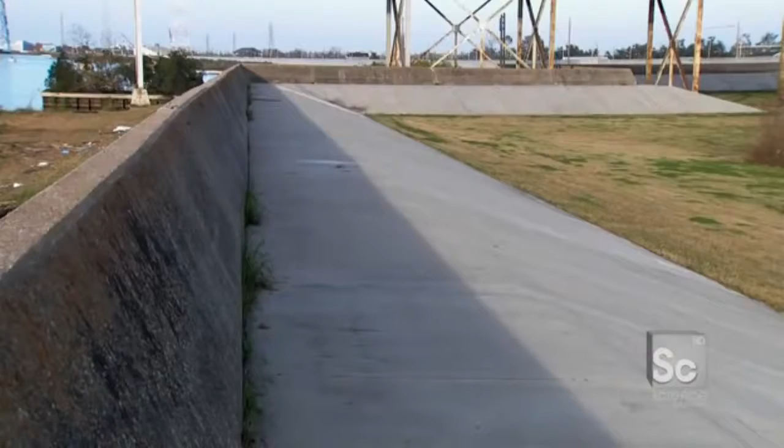Prior to Hurricane Katrina, stormwater flowed into New Orleans and was met by a 350-mile network of earthen embankments called levees. Located just 100 feet from people's homes, they held back the water, keeping the city dry. But when Katrina hit, the system was so overwhelmed by water, the levees broke in 50 places, flooding 80% of the city in just 5 hours' time. To avoid this disaster happening again, the surge barrier is being built miles away from downtown New Orleans, where it can stop the water before it enters the city.

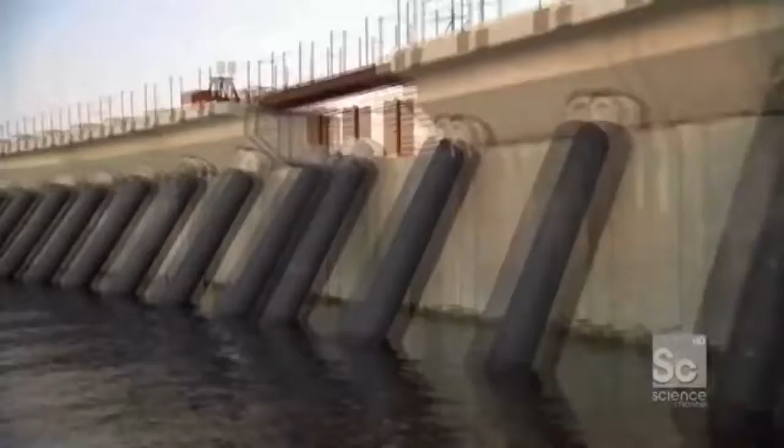Instead of waiting for the storm to come to them, for the first time, they are taking the fight to the storm. Is this a new way to think about battling hurricanes? Nowhere in the world have we built a wall trying to keep out 25, 26 feet of water. No one's ever done it before. And this height here on a storm surge is unique. You gotta remember, the hurricanes that come to New Orleans are bigger, meaner, and there are more of them.

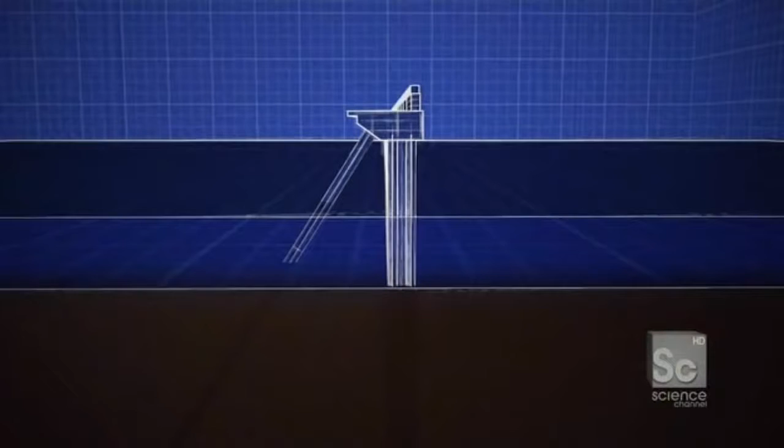To hold back a 26-foot wall of water, the barrier is fortified by 628 batter piles. When the storm surge hits the wall, what pushes back and keeps that wall upright and strong are these guys right here. They're called batter piles, and they're basically 288-foot-long steel tubes inserted into the back of the wall that support it and transfer all the loads of that storm surge into the foundation. Since there's no bedrock to hold the pile in place, over 80% of the wall is actually below the mud line. The deeper the pile is driven, the more friction there is to hold it in place. Each pile is almost as long as a football field and placed at an acute angle for added stability.

What'll be interesting about this lift is that this pile right here is horizontal, right? But in the end, we have to get this thing at a 57-degree angle to feed it into the machine called the leads. No one has ever attempted to drive piles this size at an angle before.

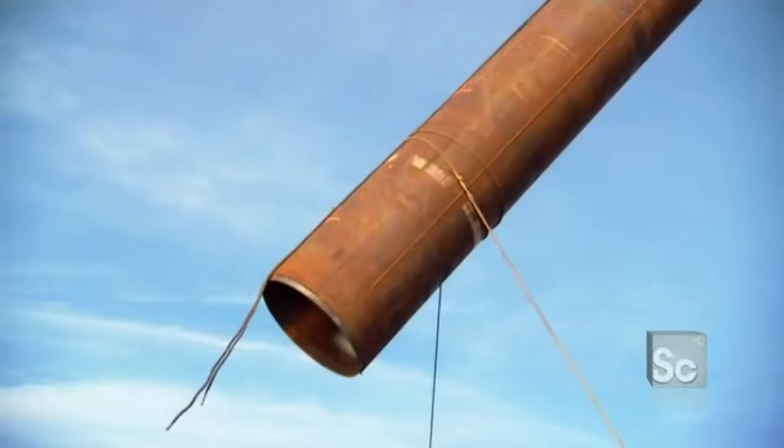To accomplish this engineering first, the Army Corps invented a massive 1,000-ton machine called the leads. Unlike traditional pile drivers that can only hammer vertically, the leads can hammer the piles at a precise 57-degree angle. And with 4 chutes, they can drive 4 piles in a row before moving on, saving almost 5 months of construction time.

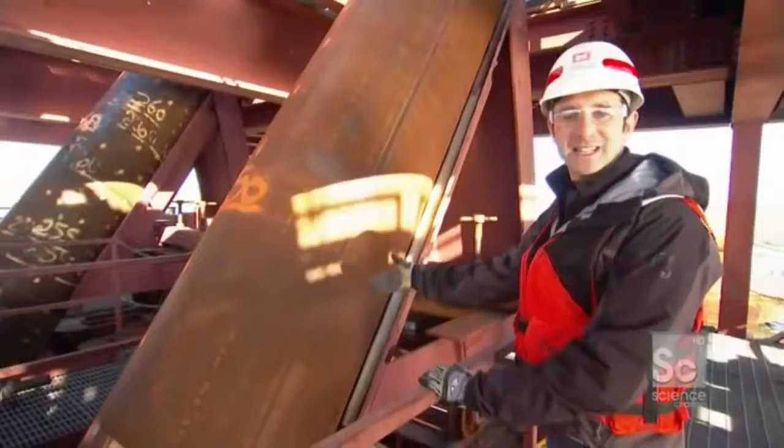So here it is, lowering it through the leads, right? The thing that's leading it right down this 57-degree angle, getting into position so we can start knocking this straight into the ground. Even the leads isn't big enough to handle a 300-foot-long pile in one go. So they're driven in two sections. The first section is 158 feet long and weighs more than 13 tons.

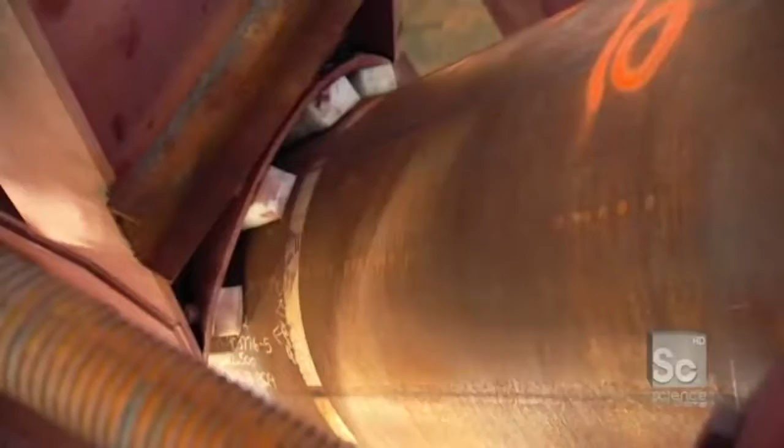So Mike, as I'm looking at this slowly creep down into the earth, this is just sliding into the soil below, right? Into the mud, yeah. I mean, there's really nothing down there, huh? Not much. I mean, it's soft. It's so soft that the pile sinks 38 feet in a matter of seconds under its own weight. After that, the friction from the mud becomes too great, so they have to use a hydraulic hammer. Do I run that hammer down? Absolutely. Time to drive the hammer.

So it's your job to control how much force this thing hits it, when it hits it, and how you drive the pile down. That's it. So before sun sets today, we're gonna start smacking this thing and send it in? Right now, the next 2 minutes. If everybody's ready, got the earplugs on, let's go. Let's do it. I got earplugs. I'm on. Let's start smacking it.

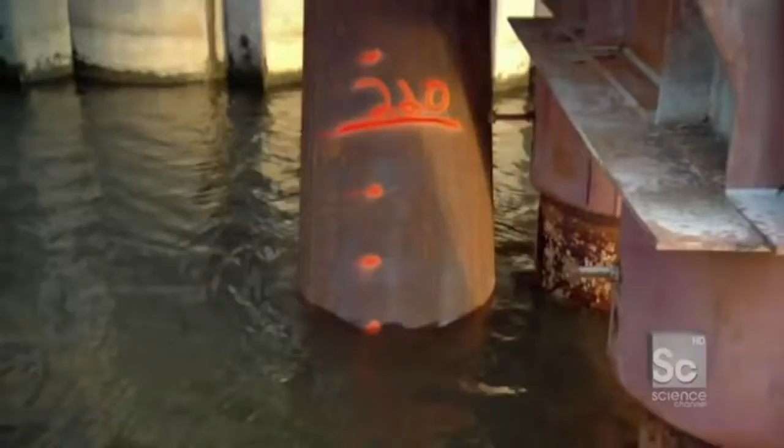So every time that smacks the pile, that pile gets pushed a little deeper into the ground. During the first 158 feet of driving, each blow moves the pile 10 inches. But as the pile goes deeper and friction increases, it takes 40 blows to move the pile that same distance.

So Mike, the first piece is now in place. Right, and now they're gonna bring over the second piece, which is that one right there.

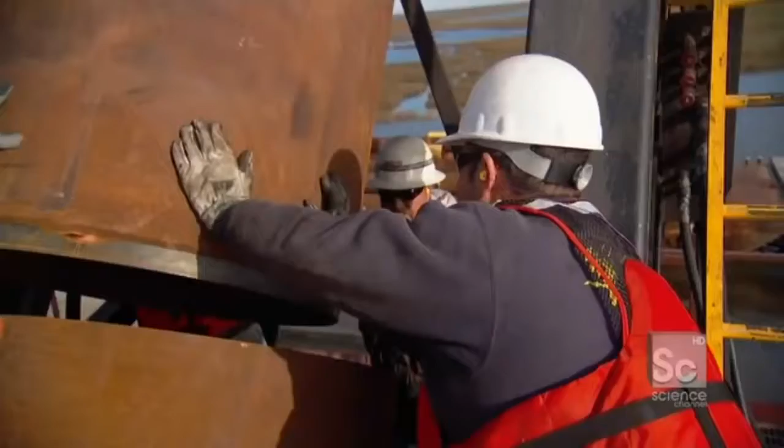Loading like a rocket launcher almost. They have to get the piece in, tamp it down, and line one end up with the next. Line it up, line it up! All right, so here it is, it's coming down. You can see we're basically gonna fit this piece into that piece, have a little bit of an overlap, and that's what they're gonna weld together.

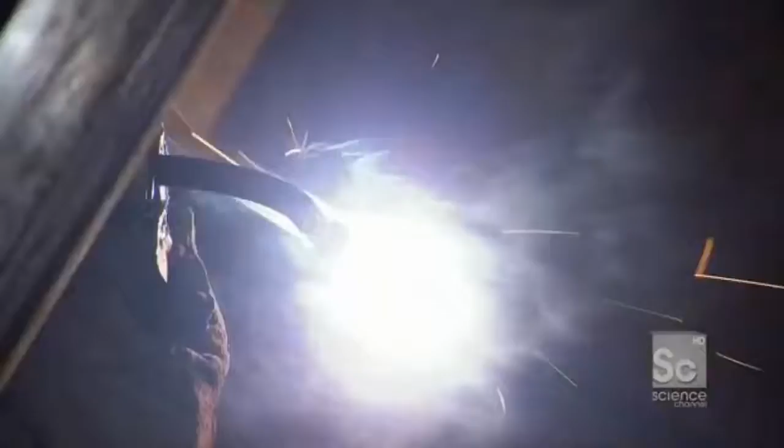So if you look right there, you can see the weld's been completed. Those two separate pieces have now been spliced into one, and now that pile is 245 feet long. The weld looks good. Yes, sir. We're ready to drive it, put it on the ground. This is the last time we're gonna see this pile in the air.

So let's flip the hammer on and start smacking. Smacking it. Are you ready? Yes, I'm ready, whenever you're ready. I was born to smack pile.

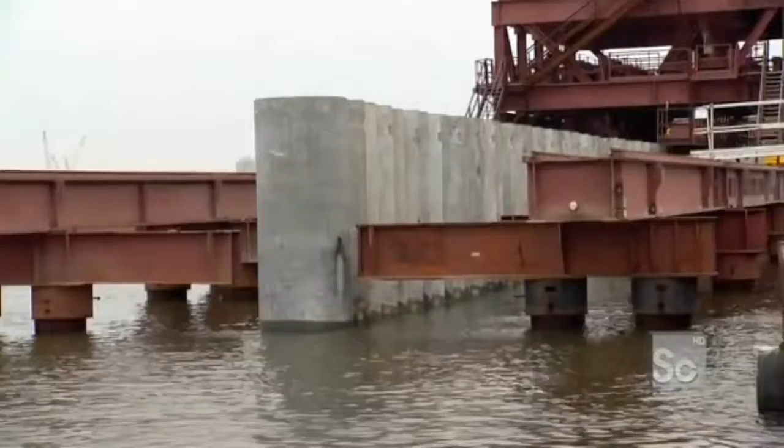It takes around 1,200 blows to get one batter pile into place. And to stay on schedule, they need to install 628 of them in just 6 months—a total of about 750,000 blows. Normally, a project of this magnitude would take more than 17 years to complete. To make New Orleans safe as quickly as possible, the Army Corps is attempting to finish the surge barrier in just 3. To pull off this incredible feat, this crew has to work through hurricane season.

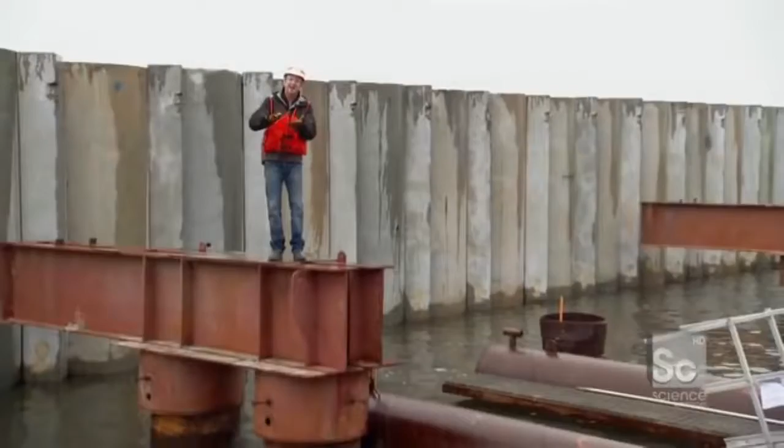So engineers came up with an innovative solution to get the job done right and done fast, even in rough waters. One of the biggest challenges when you're working in the middle of a lake is having a level surface on which to work, because barges move and tugboats pitch and roll as well. So in order to have a flat surface to accurately work, they developed that system right there called a trestle. It's a semi-permanent track that moves along with the wall construction. A trestle is basically a huge railroad track anchored into the lake bed, providing a stable workplace for large machinery.

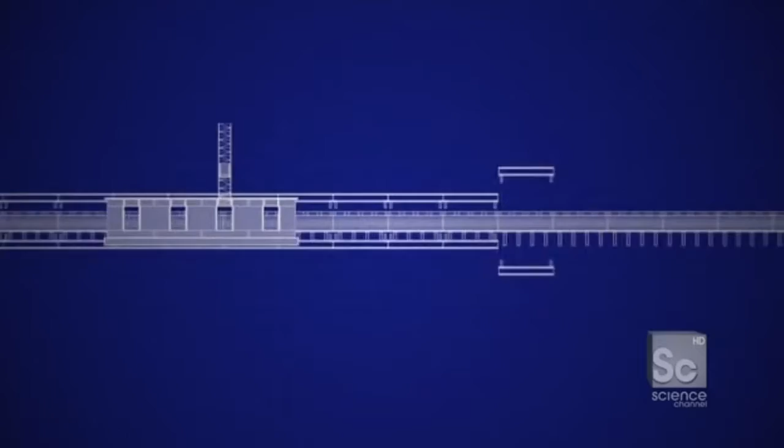The project has 1,000 feet of track for the entire 10,000-foot-long wall. So to keep construction moving forward, the trestle team has to leapfrog 50-foot sections from one end of the site to the other up to 6 times a day. 50 feet of trestle track's about to go from this barge up in the air and extend our construction platform another 50 feet. Each trestle segment has to be aligned seamlessly with the existing track. The gap can be no more than 3 millimeters, or about the thickness of a shoelace.

Okay, so now that we have the trestle track, generally speaking, in place between the two beams, let's walk on the trestle. I'm standing on the pre-existing trestle track, and this right here is the new piece of track. As you can see, we have a big gap. We'll use this plate right here to put it on either side of the track, put the bolts in, and bind the track together. 6 bolts need to be in place to ensure a solid connection between the trestles.

The issue is we have 5 out of the 6 bolts lined up, but one side is slightly higher than the other side, so we're having a problem getting in the final bolt. The holes are about 3 millimeters off. In order to make that space to get it through, we're going to torch it out.

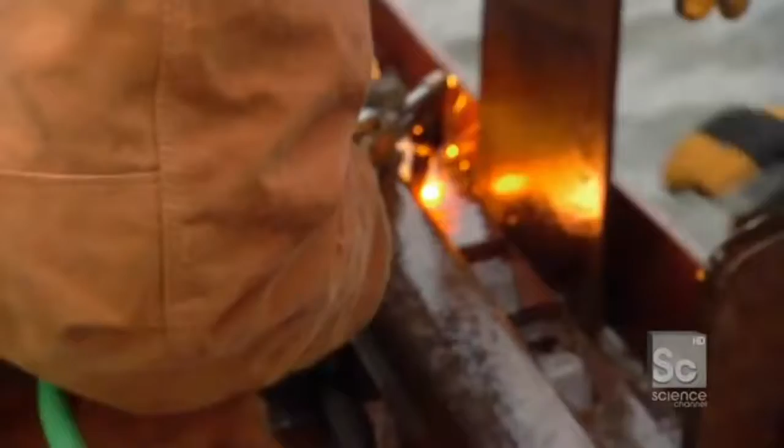Would it not have made sense for me to move before he started? And on the plus side, actually, it's really cold and rainy. My right hand is much warmer than it was a minute ago.

Well, after cutting, torching, and hitting, and just generally some emotional consternation, the sixth and final bolt is through. This track has now been extended 50 more feet. The construction site will extend. Can we go home? We're finished now?

Up next, building new lives and new hope in the 9th Ward, with houses designed to fight back against the worst Mother Nature has to offer. These houses are being built to survive another Katrina.

When you think about what took place in New Orleans, you of course think about Hurricane Katrina. But the truth is, the actual damage wasn't from the hurricane, but from what the hurricane created, something called a storm surge. A storm surge is a wall of water pushed out in front of a hurricane by high winds and low pressure. During Katrina, it caused waters to rise more than 20 feet, overwhelming the existing hurricane protection and flooding almost the entire city.

Katrina's storm surge was responsible for 90% of the destruction in New Orleans. And hardest hit was one of New Orleans' poorest neighborhoods, the lower 9th Ward. I was actually here filming 5 years ago, right after the event, and it was harrowing. There were houses that were just blown clear off their foundations. Others were torn in two. I saw a house that was actually sitting in a tree. 5,000 homes were lost in this neighborhood alone, and less than 20% of its residents have come home to rebuild.

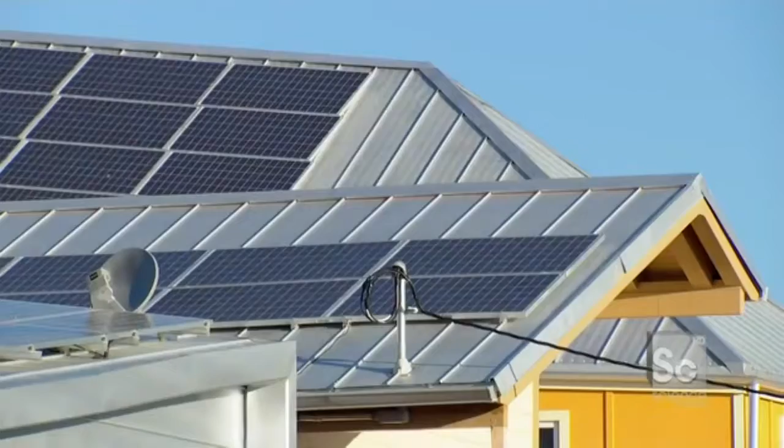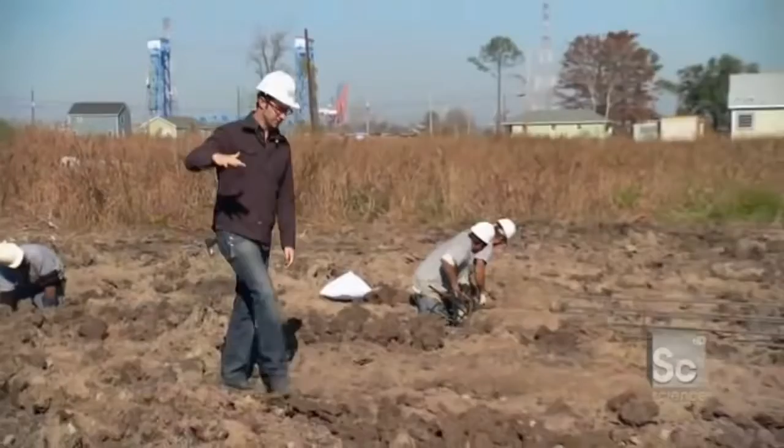These homes are re-engineering the lower 9th Ward, transforming it into one of the most hurricane-resistant neighborhoods on the planet. But one of their biggest challenges isn't wind and rain, it's the ground itself. Like most of New Orleans, the lower 9th Ward is built below sea level, which basically means the ground below me is a big swamp. You build a house here, over time, it's going to sink. So to prevent that, the Make It Right houses begin construction by driving these massive 40-foot-long piles into the earth.

This is what they had before Katrina, and this is what they're getting right now. These are built to last. These houses are built to survive another Katrina. These piles are revolutionizing how homes are built in this flood-prone area.

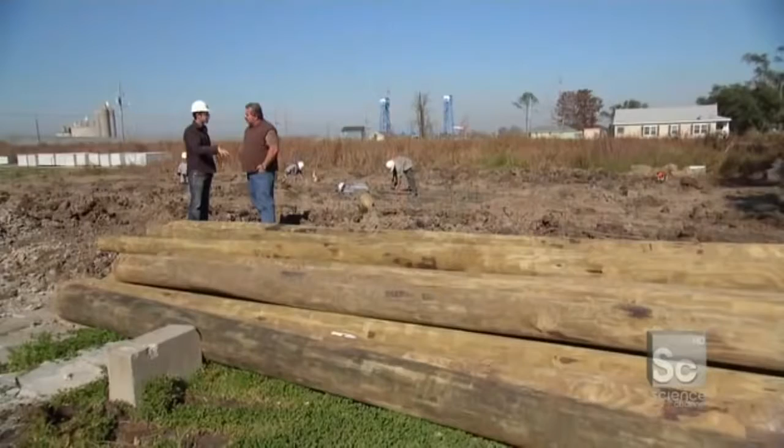Previously, homes rested on top of cinder blocks. When a flood came, the house would be lifted off the blocks and sent crashing through the neighborhood. But now, these wooden piles stabilize the soft soil so it can support a raised concrete foundation. It actually attaches to the house, strong enough to keep the home in place, even in floods more than 12 feet high.

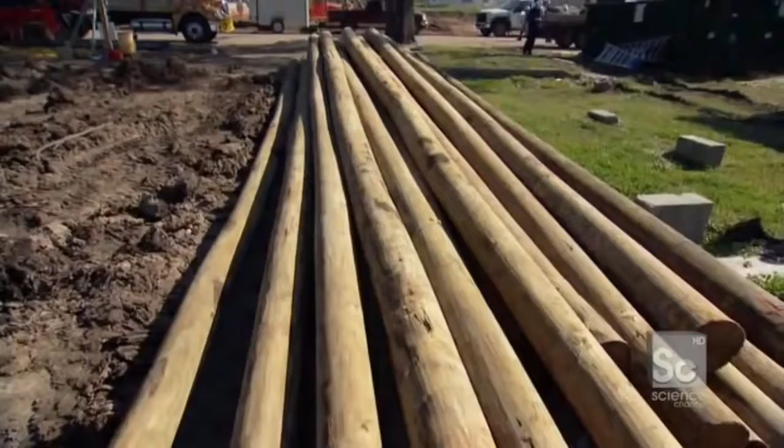Chris, how do you get a 40-foot pile rated to carry 7 tons into the swamp? You use that machine over there, called a sonic side grip vibratory driver. It puts out 50 tons of centrifugal force, and it'll push that pile underground in about 2-3 minutes.

So this is it, huh? This is the machine. It's like a construction action hero. My God. Tony, why don't you spin her around so we can look at her? This has got a kind of a Mad Max Beyond Thunderdome vibe to it, you know what I mean? Yeah, I never get tired of watching it work.

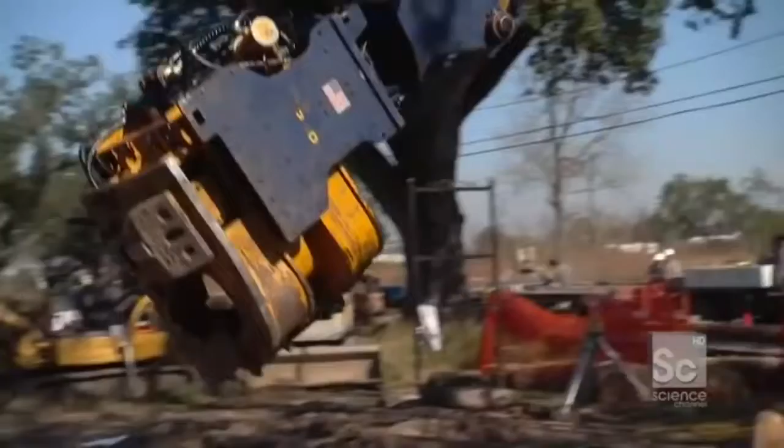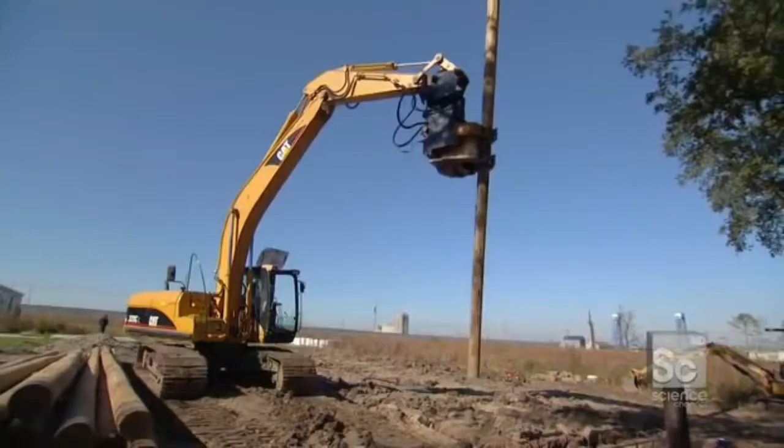No one has ever used a pile driver like this to install foundations in the lower Ninth Ward. Its unique articulating arm can grab, lift, and drive the pile all in one shot. The work gets done 3 times faster than if they used a conventional pile driver. It grabs the pile by eye, swings it into place like it's his extended arm, and puts it right down in a matter of moments.

Tony says the only place he really feels at peace is in that machine. You can kind of see that too, right? Yeah, oh yeah. To lift and move a pile requires careful coordination of 6 controls all at once.

Tony's located the pile right in the corner of the foundation. We have a little circle mark for him, and he's just gonna put this thing dead smack. Perfect.

He's lined up, he's level. Now it's time to vibrate. Tony, you ready?

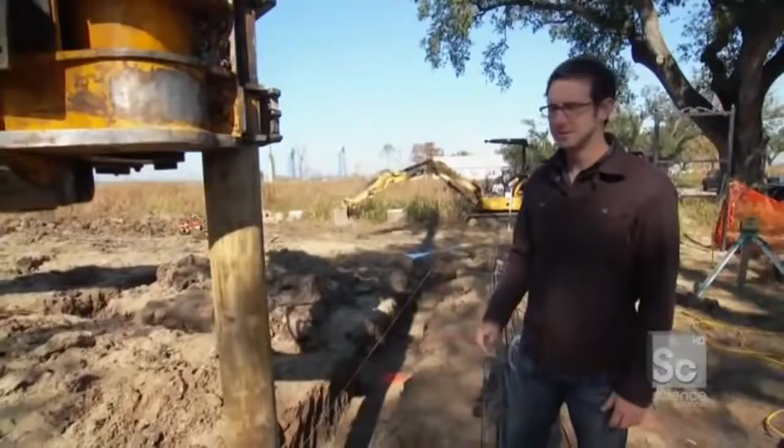You literally feel the ground shaking, within like a 5-foot radius around Tony's workings - like my feet, my toes, my back. I'm itchy right now from the vibrations running through me.

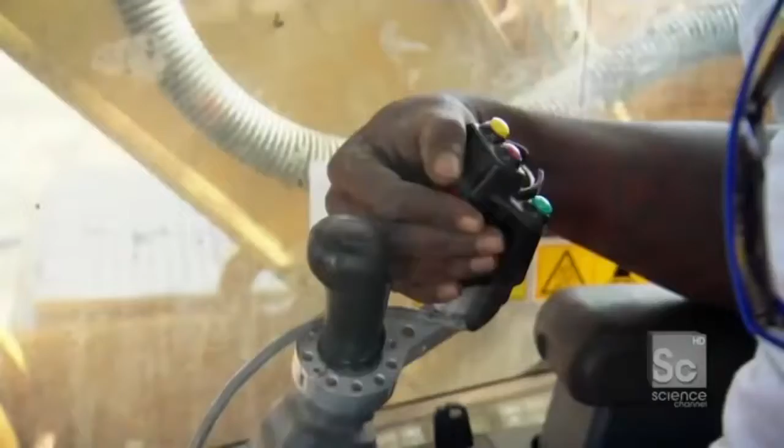So now what I'm standing on, even before the foundation gets here, is 40 feet of pile below me. And it's from this point the house now begins.

Is it hard for a rookie? The hardest part's picking the pile up. Let's give it a go. I'm gonna drop some piles.

So you're Tony. Yes. I'm Danny, nice to meet you, Dan. How you doing, man? I'm okay. We're gonna switch jobs. You do the yelling and walking around and talking and not doing anything productive. Sounds like a winner. And I'll do the work. Sounds like a plan. All right, Tony.

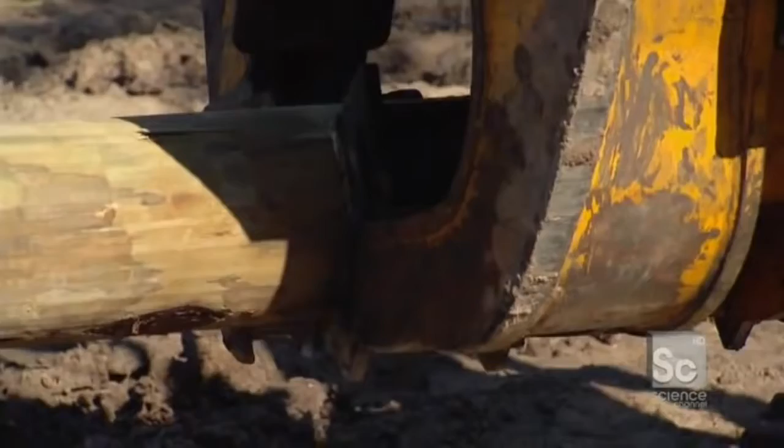Chris, watch this man, this is gonna be a little piece of magic. Can't beat that. How's she looking? First time out, that's not too bad.

Now tell me something, you're from here, right? Born and raised here. So regardless of the next event, next storm, if it happens again, you come back? We're coming back, this is home, this is life, this is reality here. I come here sometimes with my kids just to show them the houses, you know. This is what we doing, we bringing people home. It's good stuff, man. No, it really is. Thank you, it's amazing.

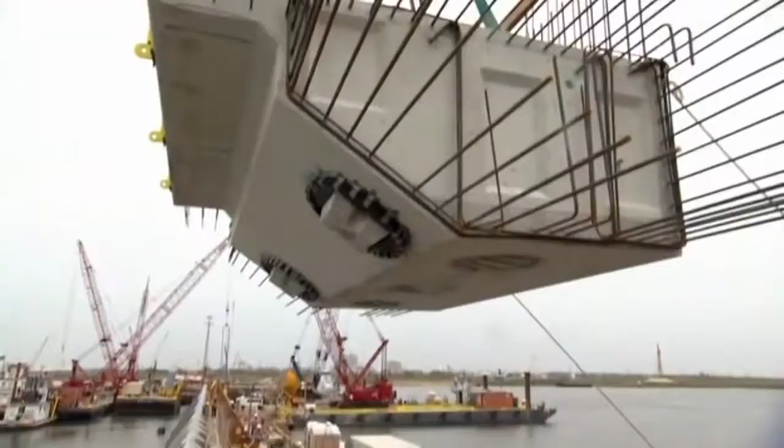Up next, putting together the strongest wall ever built, and we're gonna literally thread the needle in some of the worst soil conditions in the world.

Since it was founded in 1718, New Orleans is a town that's been working against the elements, primarily because 80% of this place is located below sea level. But for the first time, New Orleanians are trying something new, working with nature instead of against it.

New Orleans is built on top of a giant marshland, which for millions of years naturally absorbed thousands of gallons of rain and floodwater. Today, most of that spongy marsh is covered by pavement, causing significant problems for this flood-prone city. In a typical situation, when it rains, what happens to that water? How does New Orleans deal with it?

That water runs off, goes to our curb and gutter, goes about 8 blocks to the north of us, and is pumped over a levee at about 2 cents a gallon. That's expensive, it's time-consuming, it's a problem if the pumps fail. It's not sustainable. And relying on the pump station, relying on the city hasn't always worked so well for these citizens.

Over half of New Orleans is located below sea level. This paved city is basically a big bowl. When water comes in, the only way to get it out is with pumps. So when the pumps failed during Katrina, the lower Ninth Ward was left underwater for more than 3 weeks. We're in a situation where our community has a real fear of water, and it's a valid fear of water. So the folks in this neighborhood have a different mindset on water, and we're trying to change that paradigm.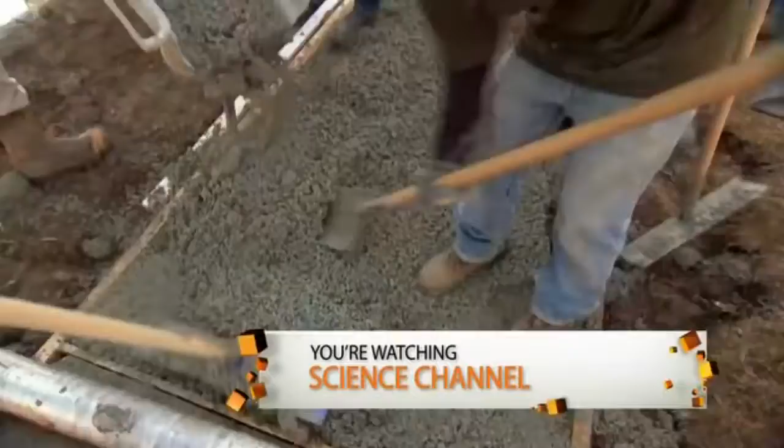To make sure this neighborhood is not left underwater again, engineers have found an innovative solution to radically reduce the need for pump stations, called pervious concrete. As water runs off our site, it does the opposite of what typical pavement does. Instead of a giant table that tilts water and flows it to the curb and gutter, this is a giant sponge that accepts rainwater, stores it in the concrete and below, and doesn't hit the curb and gutter and run off our streets. So you're telling me this driveway and this sidewalk, when rain hits it, it's actually going to absorb that water?

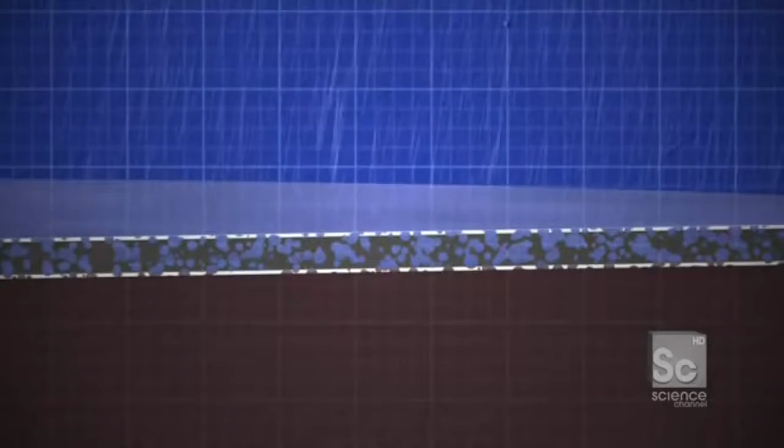Correct. Unlike conventional concrete that repels water into the storm sewer, pervious concrete absorbs it. Filled with tiny air pockets, it allows water to flow through it and into the native marshland below, where hundreds of thousands of gallons can be stored naturally.

Do you have any actual finished stuff that we can see? Yeah, we have a little mock-up right here. It actually does look like a Rice Krispie treat. Look at that. All right, let's simulate right now.

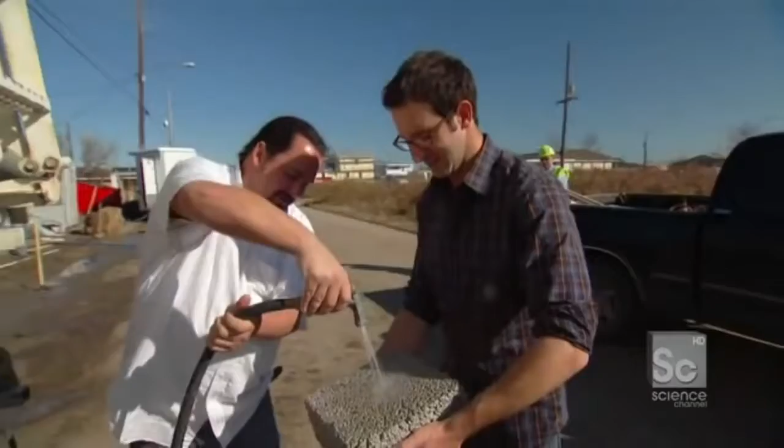I'm a driveway, you're a rainstorm, and the rain's coming in. It just stores up, it's just eating it like a sponge. And then it comes out the bottom. Look at that. Now, typically, all that rain we just dumped down would go from this driveway into the sewer system and have to get pumped out. Correct. At ultimate build-out, we will be saving several hundred thousand gallons of water hitting the storm sewer every rain event.

And that all starts with you, me, and a bunch of guys pouring some concrete. Absolutely. Here it comes.

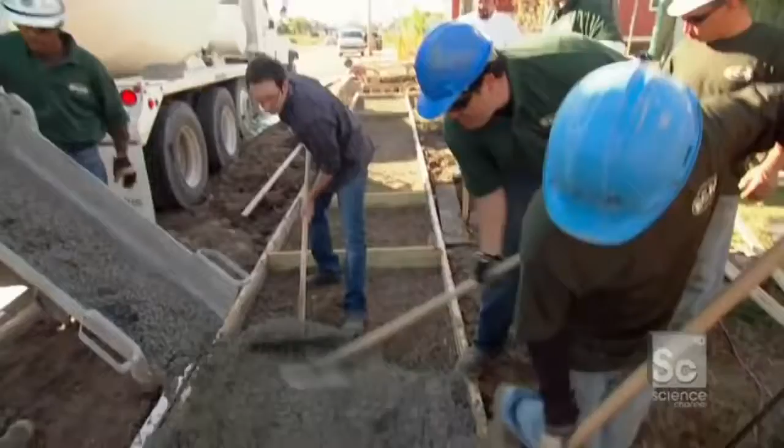It doesn't look normal, right? It's much drier, thicker, and chunkier. Because of this consistency, pervious concrete pours much slower than conventional concrete and dries much faster. So we have just 15 minutes before the concrete sets. We're actually trying to push the concrete out, but then actually compact it. Yeah, we're gonna compact it.

We're gonna pour it three quarters of an inch higher. Got it. What I'm doing right now is sort of the opposite of what you do with normal concrete. Typically, you vibrate concrete to get the air bubbles out. Here, we actually compact it tight to get lots of air bubbles inside of it. That's how the water goes through it.

Compacting the concrete is the most critical part of the process. If it's compacted too tight, it won't absorb the excess water. Too loose, and it'll crumble. To do the job quickly, they use a specialized 150-pound roller called a screed.

Ready? You want to pull it? Yeah, now I'm pulling it. All right, come to me. Here we go, stay with me. Here we go, nice and slow.

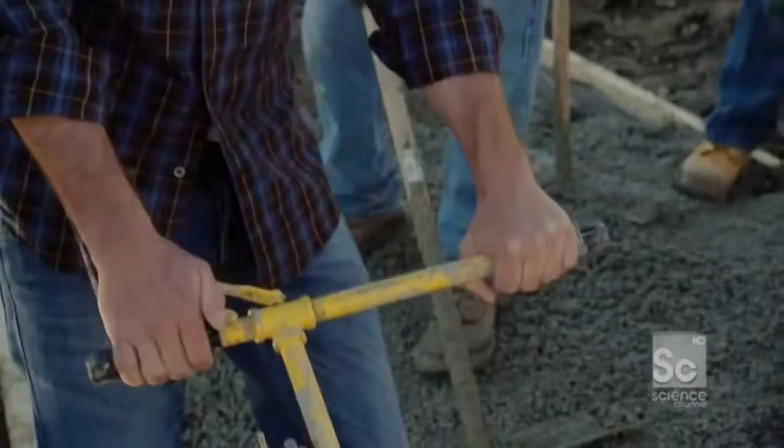I'm making pervious concrete. You know why? Because I don't want concrete to push water into the sewer system, do you? No, you don't. Good job. That was perfect.

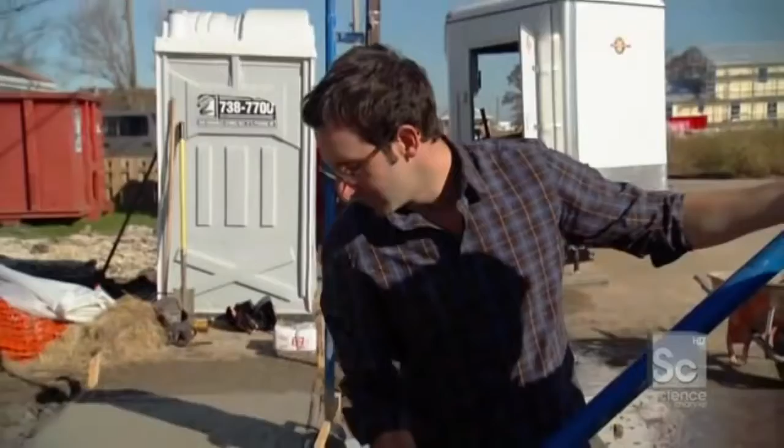Beautiful. And although it may not look like it, this is actually the finishing touch. This is the layer of concrete that you'll see every time you walk down the Make It Right streets. Big, hard, dense Rice Krispie treat that all the while is sucking up the water and making sure it does not go into the streets. I love it, man.

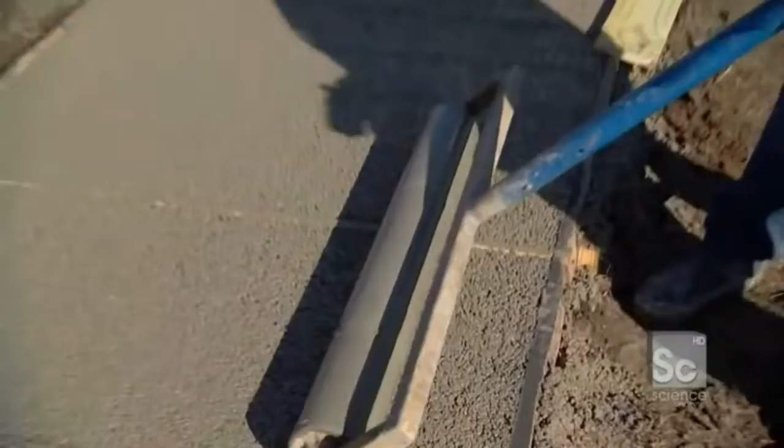So for me, what I'm fascinated by is that you want this to be strong and heavy and beefy. But if it's too heavy, the soil's so weak your wall will actually start sinking. That's one of our challenges. We need a very strong wall, but you also need a light wall, comparatively speaking, for concrete. You can't build a Great Wall of China here because the massive weight of it would simply sink out of sight.

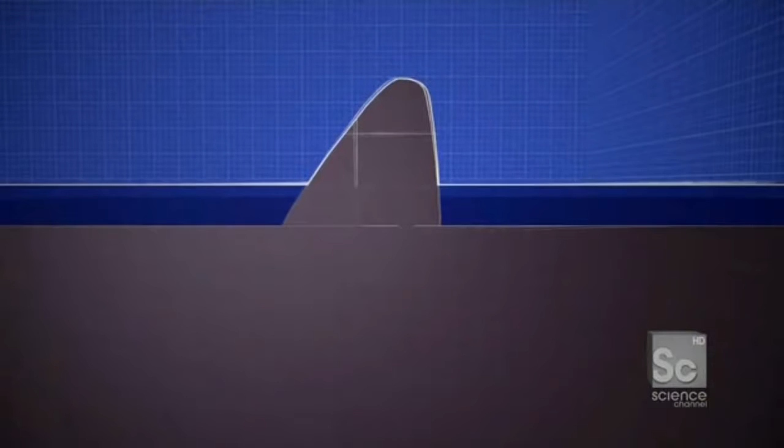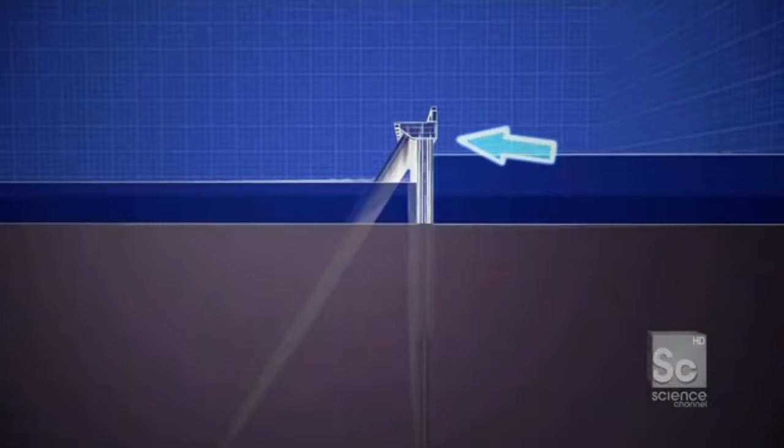Instead of building one solid structure like most levees or dikes, engineers designed the New Orleans surge barrier as an A-frame. It uses half the material, but it's actually stronger than a solid structure. The key to its strength? 330 concrete caps placed at the top of the A. They link the vertical piles to the batter piles, directing the force of the storm from the front of the wall, through the batter piles, and down into the marsh, dispersing the loads and keeping the wall strong but light.

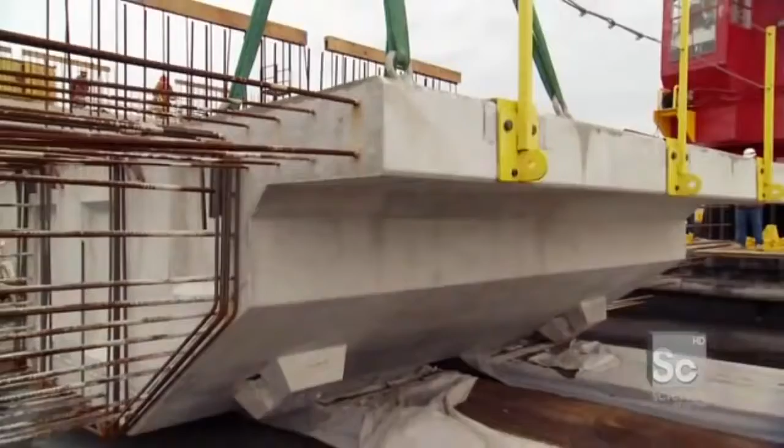All right, so Vic, when the soldier piles are in, the batter piles in place, what ties them all together and makes them one structural system are these guys right here. That's right, these are caps. So essentially your chain is as strong as your weakest link. Yeah, absolutely, and this is the link, essentially. This is what connects the two types of piles. Right, this 96-ton piece of concrete, very high-tech design, transfers that energy.

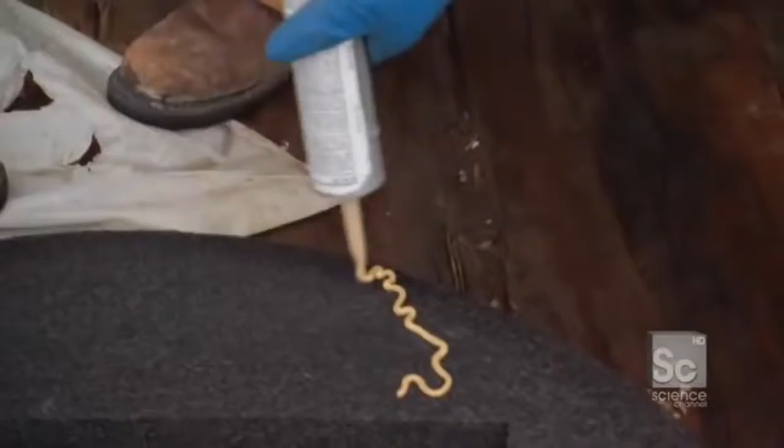Before the cap can be lifted, each joint has to be reinforced with a waterproof seal installed between the cap and the piles. This is the seal, right? It's like the gasket, to hold the concrete on. Keep it tight, to make sure the batter pile meets the cap and you get one tight joint. The seal between the cap and the batter pile is created by the weight of the 96-ton cap.

Luis, AKA Jackson Pollock of the glue, uses construction glue to hold the seal in position while the cap is lifted up onto the wall. All right, Luis, let's pop it on.

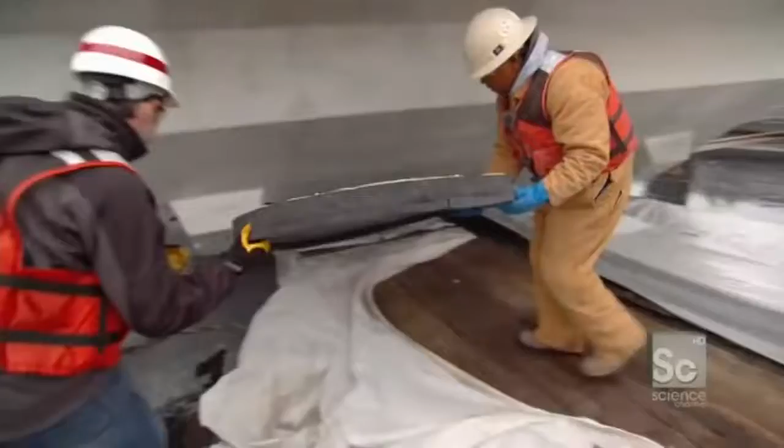96 tons, holding back 200 billion gallons of water. And during construction, duct tape. How's she looking, Luis? Looks pretty good. Pretty good? Yeah, looks good. Very good? Very good, I say.

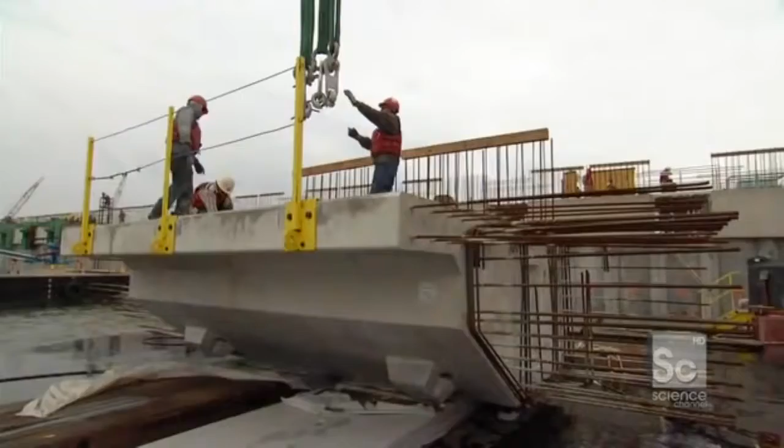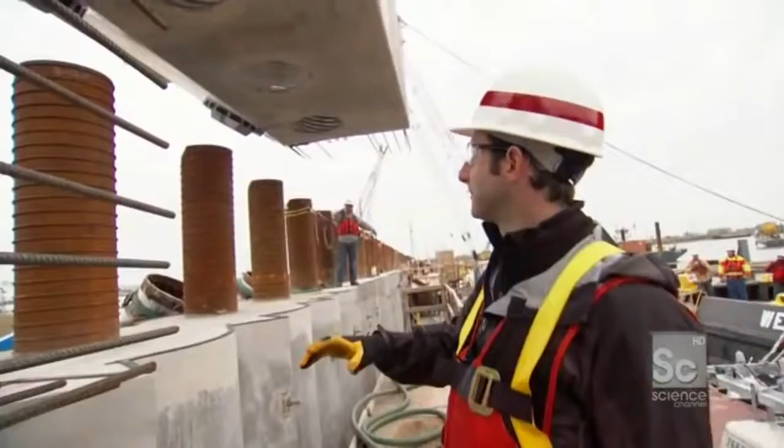Okay, that's it, our four shackles are attached. This now 96-ton cap piece is about to get lifted up from this barge and placed atop the flood wall. The 300-ton crane is located on a barge, causing the cap to bob and swing during the lift, making precise alignment a real challenge. And we're going to literally thread the needle, take these 3 shear pins which extend the soldier piles and put them right into the cap, fusing them into one.

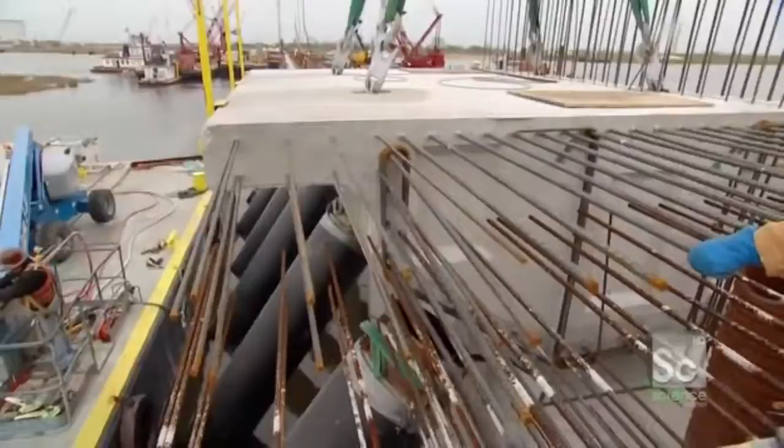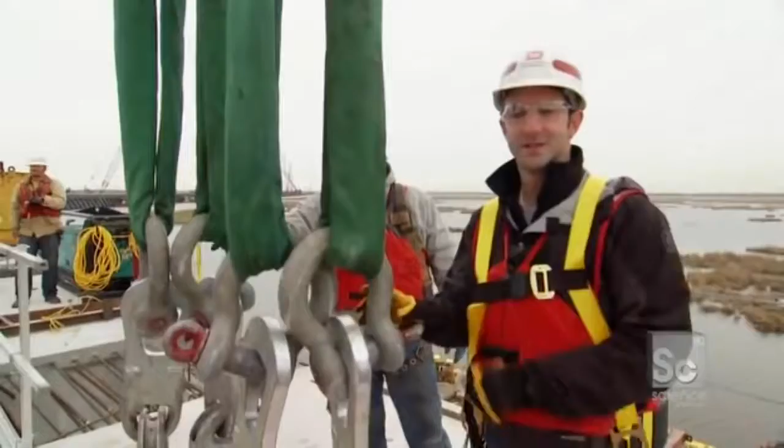Once in place, the cap transforms the wall from 5 separate elements into one structural unit for the first time. Even as it comes down a few inches, 96 tons or otherwise, a little bit of motion can still move the thing, so we're shifting over just a couple millimeters. As you can see, the cranes are detached, sending the shackles home. This is in its final location, 96 tons lined up within millimeters. One down, move on to the next one.

Up next, we're going. Come to papa. Racing to fuse the wall together with one of the fastest concrete assembly lines ever designed.

You can open it on up now. Open it on up. But first, what wind speed can the new Make It Right houses in the Lower Ninth Ward safely withstand? The answer after the break.

The answer to our trivia question: the Make It Right houses can safely withstand 200 mile per hour winds, enough to survive a Category 5 hurricane.

Given the amount of investment that's going into saving this city, sometimes the question is asked, should we save New Orleans? But it's important to point out that this is more than just Mardi Gras. New Orleans represents 1/4 of all domestic oil production for America. The Port of New Orleans is one of the most important ports we have, it's the very gateway for all shipping traffic to the Midwest. This port is so important, it's been defended for more than 200 years. The surge barrier is designed to continue protecting the port and the 2 million people in and around New Orleans for years to come.

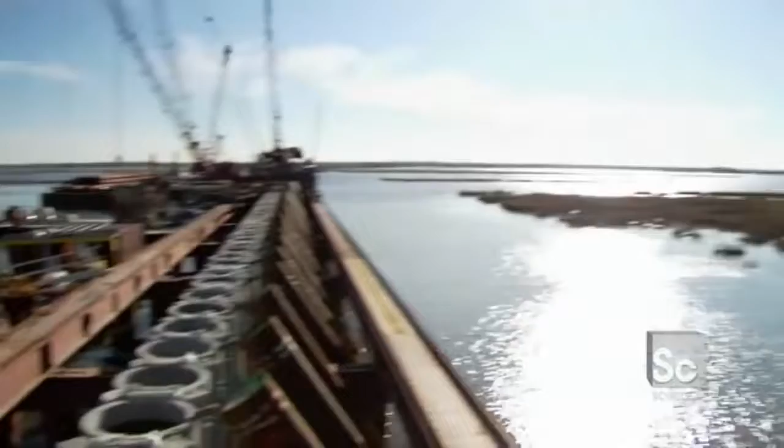We're constructing a wall here which we know is pretty robust. I mean, several hundred years from now, this structure will still be here because nobody's going to take it. It's not coming out anytime soon. Right. So the reality is this will provide viable surge protection for the city of New Orleans for a long time to come.

This massive wall is engineered to last for 100 years, but they have to build it in just 18 months. You guys have basically designed a system for speed. Yes, for speed, big time. Engineers have been thinking about this for a long time. We're just making it work.

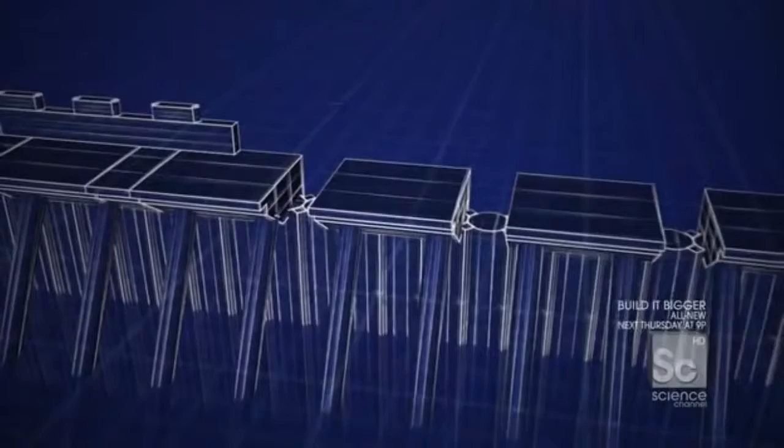To save time, they're using an assembly line. First, a crane drops in prefabricated concrete caps, leaving a 6-foot gap between them, not wasting time lining them up. Then behind them, another crew fuses the caps together with poured concrete, smoothing out any misalignments. This system shaves off more than 6 months.

So essentially, rather than have to worry about fussing and getting it just right with millimeter tolerance on site, they just keep moving. Because even if he's a little bit off, misses the mark a little bit, Rusty comes in and just fixes it up. It's like Legos with a little bit of silly putty in the middle. Yeah, you got it.

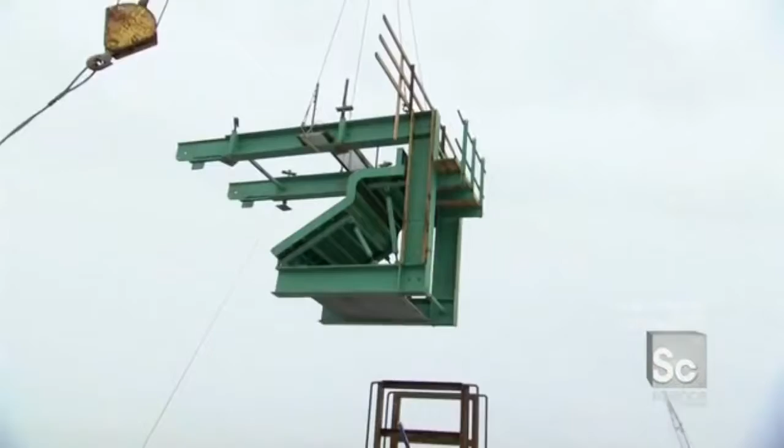To fill the space in between the caps, they pour the concrete into custom formwork. What we're looking at right here is essentially a 10,000-pound mold, a shape that we're going to bring into place, which is shaped exactly like the precast caps, put it in place, and bring 2 precast caps together as one.

Cabling on down a little bit. All right, we got our hands on it. Hold that, a little bit of right swing. Down easy, 6 more inches. A little bit, all right, hold that. Another shot of boom up now. Booming up. You done this before?

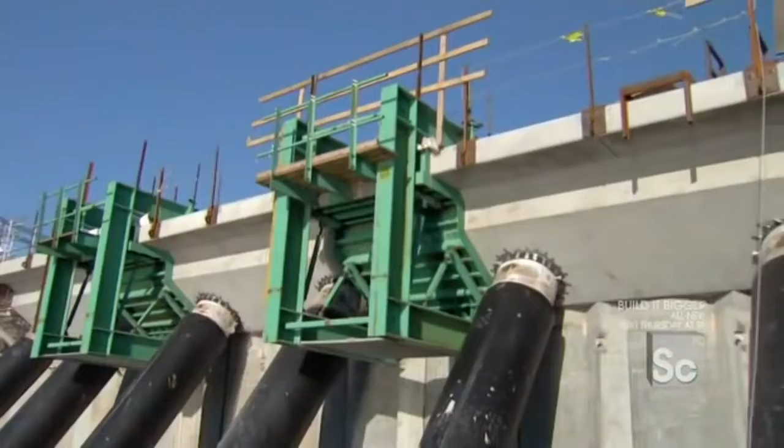A few times. The formwork snaps into place with alignment pins, matching up perfectly with the 2 caps on either side. This snug fit allows the poured concrete to smooth out any minor errors in the placement of the cap.

Okay, Rusty, so when I got here about 15 minutes ago, there was a big gap in between these 2 pieces of precast. Big hole. Form is now on, both of them. Done incredibly quickly. Yes. Tighten up the bolts, put in the pins, and then pour some concrete.

The team now needs 36 tons of concrete to fill the gap. But they've got to transport it from the concrete plant 2 miles away to the construction site in the middle of Lake Borgne, all before it starts to dry.

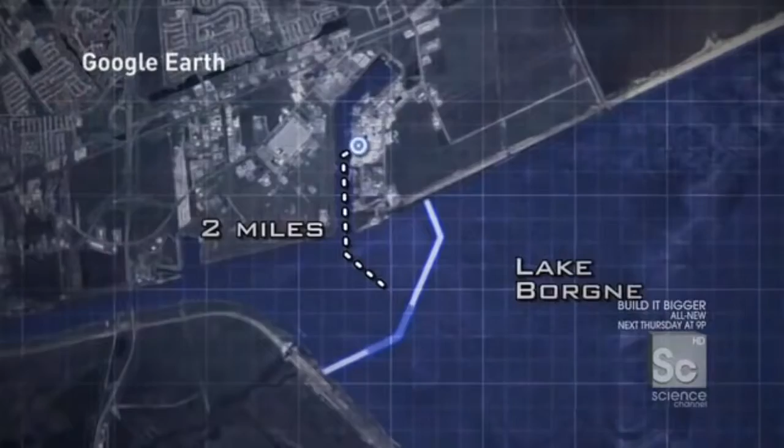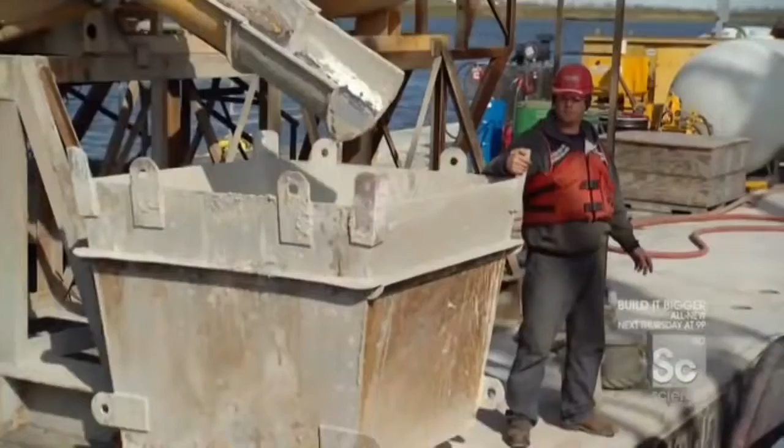There it is, coming around the corner right now. So here's the concrete. It takes about 15 minutes from where we're at right here to get to the dock. And then naturally it takes them about 10 minutes to load and then 15 minutes back out. Since they're losing about a half an hour in transit, Rusty's team now has a narrow 60-minute window to pour the concrete before it cures.

We're going, we're going right now. Come to Papa. To fill the gap, they have to lift 9 bucket loads in under an hour. You can open it on up now. That's it, let's go get another one. We just keep going. Well, there it is. As fast as she came, she went.

2 yards of concrete in the hole, down the chute, and in the space. 2 yards go out, 2 more yards are coming in. It just comes in fast. Coming on down, here it comes.

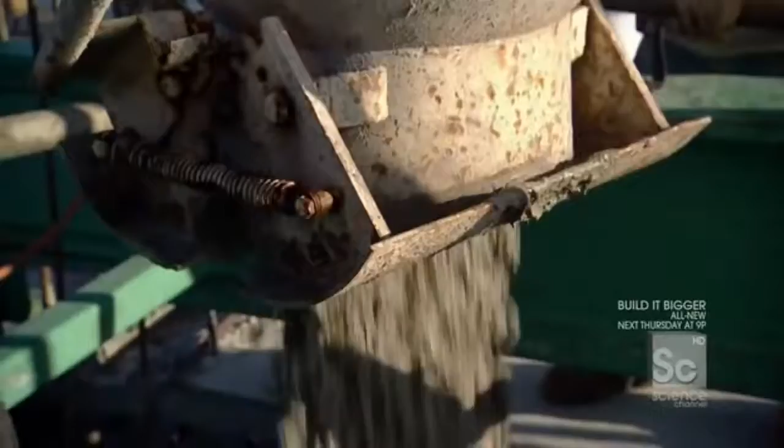Once the gap is filled, it'll dry in 2 days, permanently fusing the caps into one monolithic concrete structure. Whole thing took us, what, 15 minutes? Probably 15, 20 minutes.

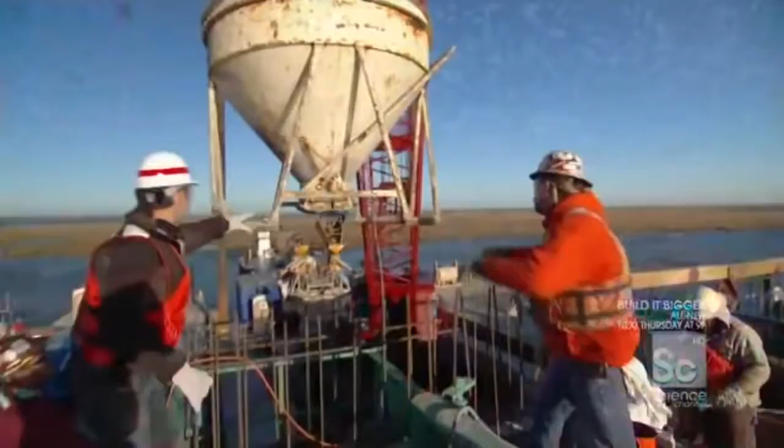When you're doing a job like this, pouring this concrete, it's not hard to remember why you're doing it. Everybody out here enjoys coming out here, but we are building it for a reason and for a cause, to save people's lives, property, all that. You get a sense that this thing is done right, this wall gets done in time, this city's gonna start to come back? Oh yes, I believe that 100%. This innovative concrete assembly line is giving New Orleans a barrier that will act as the primary line of defense.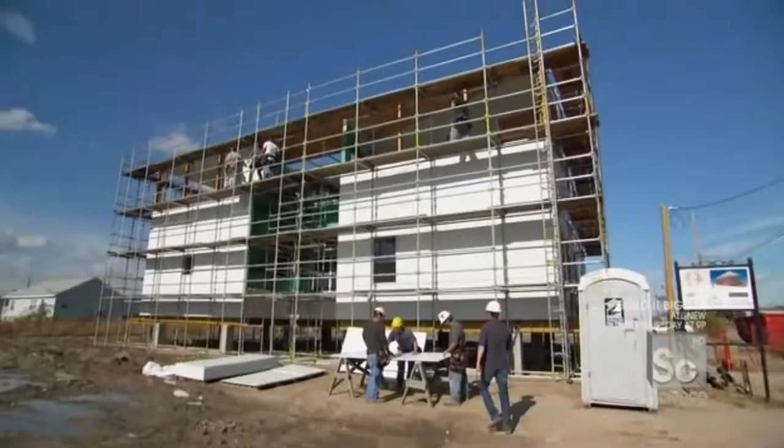On a smaller scale, another revolutionary type of concrete is being used as a second line of defense to design homes 3 times stronger than normal. The Make It Right houses are designed to survive a hurricane, but also to last the test of time. Instead of wrapping them in traditional wood siding which rots over time, they're trying something new, wrapping these houses in cement, using something called HardieBoard, a cutting-edge siding made of compressed cement designed to last over 50 years.

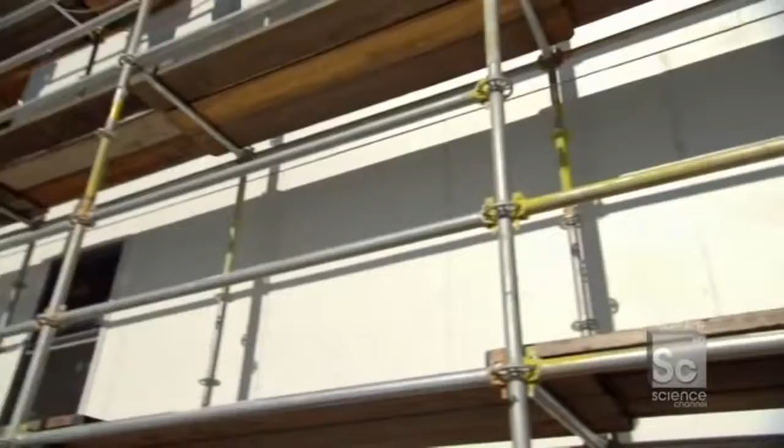So what do we have in this environment that bangs up the siding so badly? A lot of rain, humidity, storms. You're in the Gulf South, a lot of moisture, so the outside of these houses are kind of getting slaughtered. Absolutely. And what's different about this cement board? It will not rot away. This siding is made of an innovative compound that does not mold or rot when wet. Unlike traditional houses that have to be demolished after a flood, this house will simply dry out in the sun.

But in order to do its job, the siding has to stay on the house, even in Category 5 winds. During a hurricane or any strong storm event, there's that suction where they actually pull the skin off the building. If that corner was to come off during high wind, it would take that sheet, and probably that sheet, and keep on going. They've calculated the position of every nail to ensure the siding is windproof. There is something tank-like about taking a house, wrapping it in a kind of thin cement frame, and keeping your nail patterns hard like rivets. Absolutely, like armor plating. This house is going to be here for a long time.

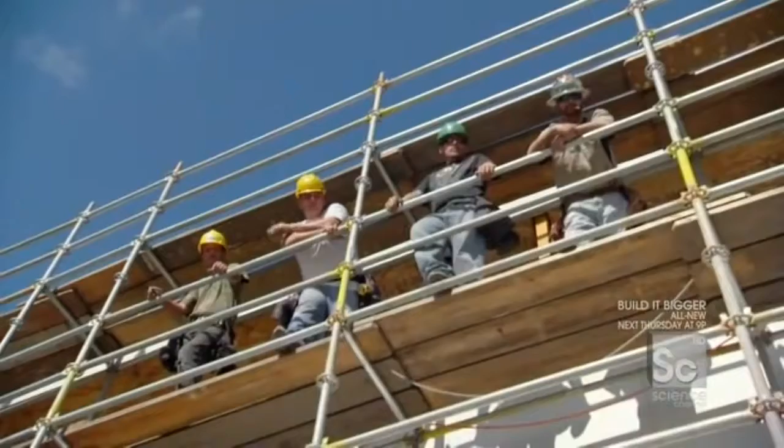So how do we install the cement fiberboard? We got some guys up top getting ready to install some right now. It's only a half inch thick, but this 4x8 piece weighs almost 80 pounds, twice the amount of traditional wood siding. There it goes, cement board to the sky.

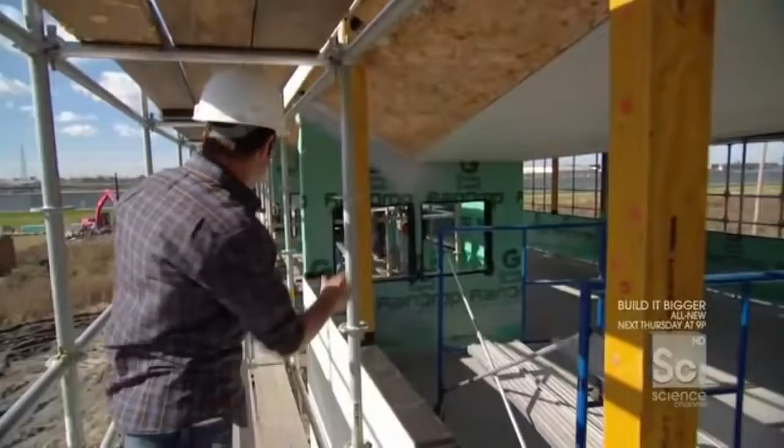I'm now standing on the 3rd floor of the house, and what you're looking into is actually an outdoor covered deck. It's on this underside of this covered area we're gonna apply this board.

All right, fellas, how you doing? Watch your feet. So you're from Louisiana? New Orleans, an amazing place, nice weather, sick architecture. Oh, and heavy cement board.

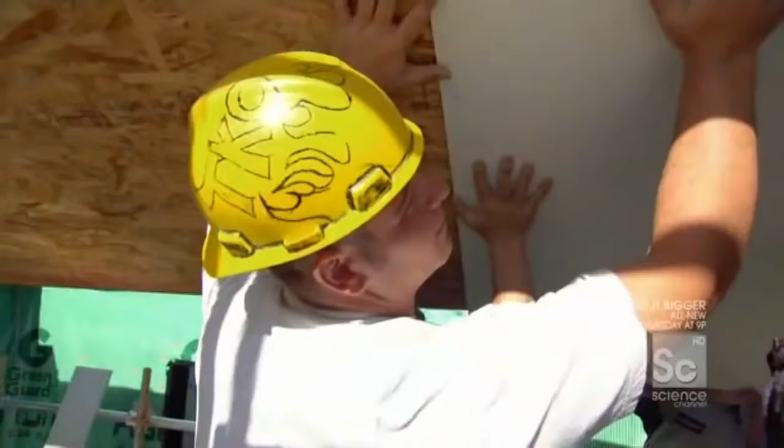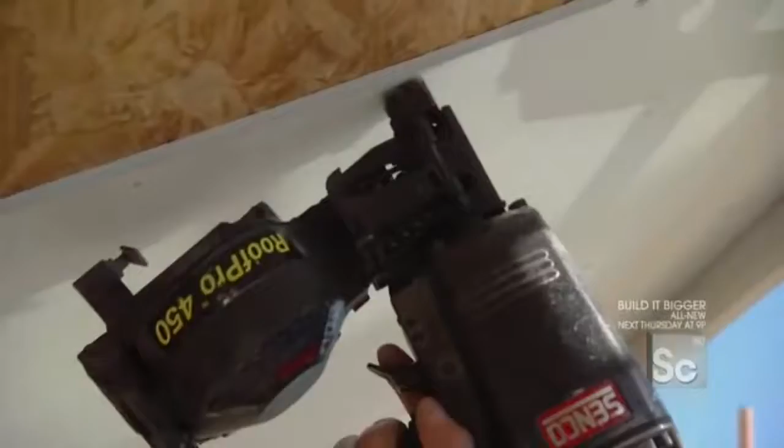Yeah, we're just gonna kind of roll it over. It takes 6 people to position this single panel. It has to be perfectly flush with the previous board in order to form a windproof seal. Who's got a nail gun? Right behind you. That is on pretty damn tight.

And that's it, look at that. That quickly, about 8 feet of siding, the very outside of the house, is in place. This is what will keep rain out of this thing, keep it dry, and lasting 50 years. Isn't that right, Fred? 50 years. Once they put paint on there, it should last a while.

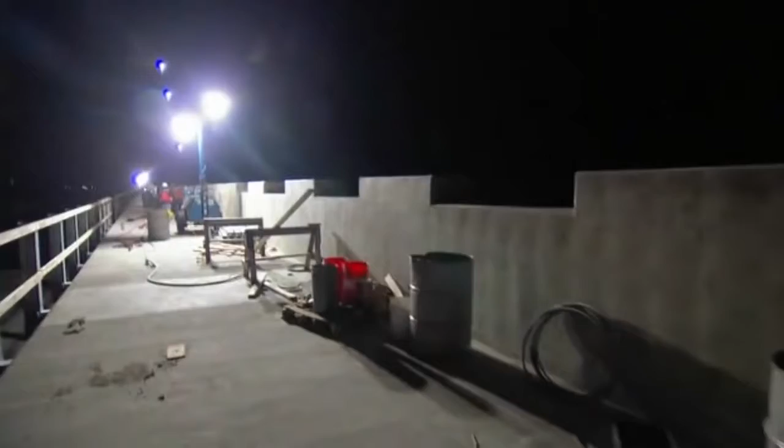Coming up, finishing the world's largest surge barrier with a medieval castle-like design that can slice through 100-foot waves. You look at it, you think it just looks cool, like you got archers shooting bows and arrows, but there's a reason behind it. There's a reason.

New Orleans' new 2-mile-long surge barrier will give residents much-needed hurricane security, but it's difficult to rebuild with confidence until it's done. With the next hurricane season just 9 months away, this construction team is working around the clock to finish in time.

Well, it's about 8 p.m., the sun is set, the moon is out, and I'm going to work right now. Given this non-negotiable deadline of finishing this wall before hurricane season 2011, the guys are not just working 7 days a week, but also 20 hours a day.

Rick, Max, father and son, formwork crew. What is it, the graveyard shift? Just about, yes sir. It falls to the night crew to finish one of the surge barrier's most crucial elements, the parapet wall. You look at it, you think it just looks cool, like it's a castle thing, like you got archers shooting bows and arrows, but there's a reason behind it. It's actually part of the system that beats down waves.

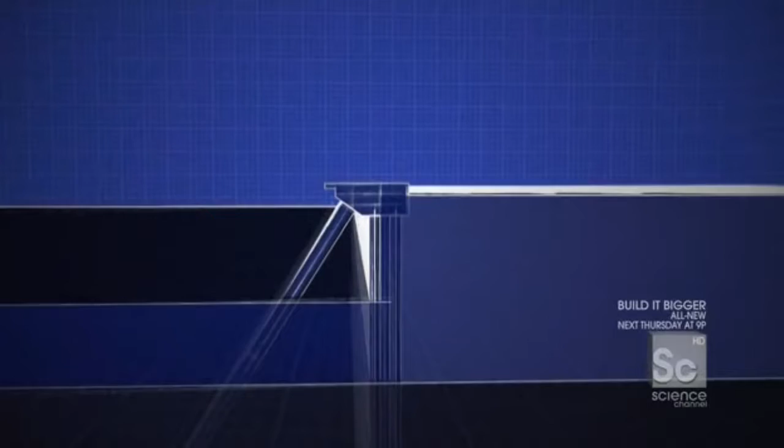While the lower part of the wall holds back the storm surge, it's the upper part of the wall that takes on the massive waves on top of the surge. Its castle-like notches are designed to chop big waves into smaller, less destructive ones that splash harmlessly on the backside of the wall, preventing millions of gallons of water from ever reaching the city.

In terms of what's actually fighting the storm and fighting the waves, this is it, right? This is the final edge of this thing that's actually going to hold back the water. That's it, and we're pulling off that form tonight. You're going to see what it looks like when we pull it off for the first time. The parapet wall is made up of 2-foot-thick concrete poured each morning.

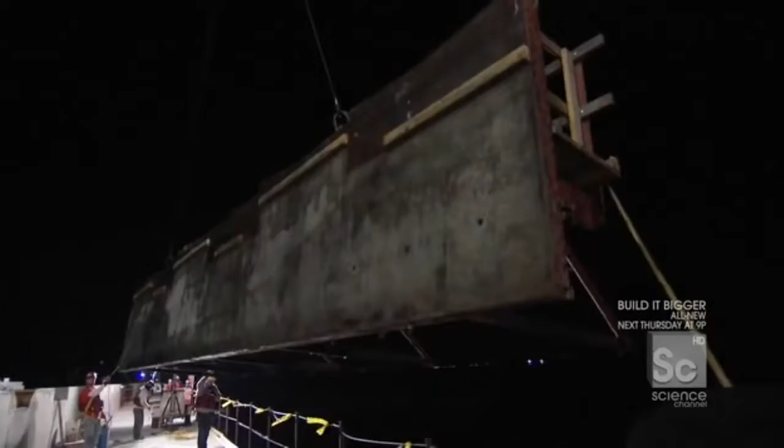To keep the daytime crew on schedule, the night shift has to remove and reset two of the massive 36-foot molds in just 6 hours. So by day, they place the concrete. At night, we pull the forms, we set the forms. Next day, they come back, they pour the concrete. On and on.

That's it, it's ongoing. Leapfrog, ongoing. Got a mile and a half of it to do. We got to get busy, stay busy. Should we do it? Let's do it. Still not be up on top. On top? Let's go. All right.

The forms are 8 feet tall and weigh over 10 tons. To lift them, the crew needs the biggest crane on site, the mammoth 240-ton barge crane.

Rick's putting a little bit of tension in the line to look at the shackle, make sure it looks right, that they're even, not pulling, not buckling. If he's happy, we're going to get off it and start to lift. What do you think, Rick? It's holding good. Let's go ahead and get down.

All right, the formwork is ready to go. Crane has tension.

As it comes up, you'll get to see the exposed parapet for the first time. So just as we've gotten this thing off, we revealed the finished concrete wall, cleaned it, not a moment too soon. We're gonna pop it back onto the rebar and begin the process all over again. It all starts over again.

There's no time to waste here, is there? You're holding up the show.

Let's go. The most important step is to knock out the wooden blocks that form the parapet wall's wave-chopping notches. A couple of smacks, pop it up, take the pry bar, pry it off. All the while, do it such that we don't damage it so we can reuse it on the next form. You got it, I'm on it.

Who needs a pry bar?

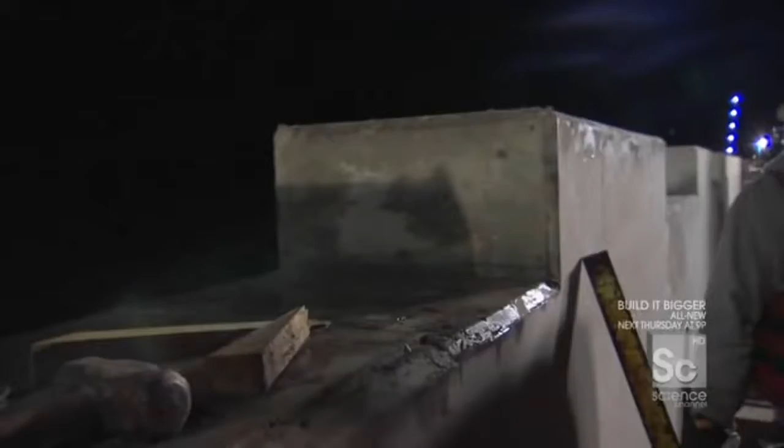This way it's supposed to come off and stay intact. Look at that nice edge. So we'll pop a couple more of these off? Pop a couple more, and we'll go check on the form, see if it's ready to go. I promise I won't break them. Take care of it.

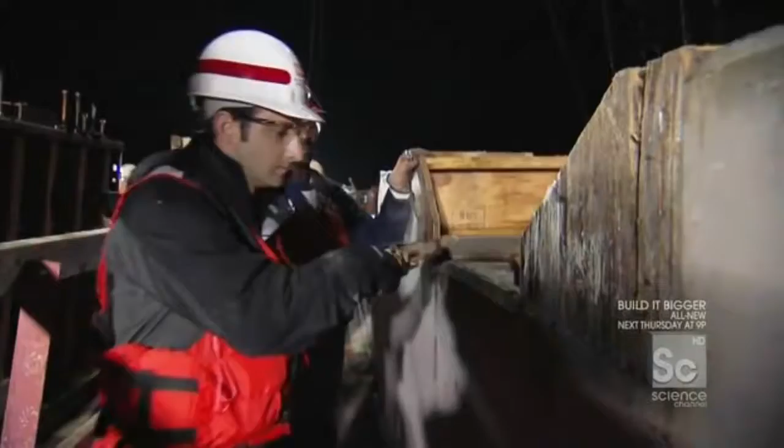Nice, smooth, 90-degree, notched out finish. With all 12 blocks removed, the wall is 36 feet closer to completion. Only a mile and a half to go.

Do you get that sense that after 5 years, New Orleans is beginning to get back on its feet? It's starting to get back. They ain't never gonna take it away from Louisiana. We still got it, we're just putting it back together so we can enjoy it again. And this wall's a big piece of that. It's gonna be a big part of it. Makes you kind of proud of what we're doing. Right now we got work to do, we need to get this done.

Understood. In just 11 months, the surge barrier will be operational, giving the people of New Orleans hurricane protection they've never had, and the confidence to come home and rebuild in the city that they love.

See, this is my home away from home, and I just love looking at New Orleans. So, Miss Leggett, when someone who's not from here looks out and says, has New Orleans got a shot, is it going to come back? I tell them yes. Yeah? Yes, good shot. Good shot.

Miss Leggett and more than 300,000 others have already returned to New Orleans to rebuild and transform their city. The recovery of New Orleans is a complicated issue. On the one hand, if you don't hold back the water, the city just won't survive. But beyond fortifying walls, it's also about building a community, a place people want to call home. It's part infrastructure, but it's also part dining room table. And what I found in New Orleans is that they're actually doing both.

8 miles from here, the new surge barrier will hold back the next Katrina. Here in the Lower 9th Ward, one of the worst hit areas, you're seeing more than just signs of recovery, you're seeing a full-blown redevelopment. The Make It Right houses are taking what they learned from the tragedy and transforming it into innovation. And that, in the end, is what real recovery is: taking the existing culture of New Orleans and transforming it into something new.